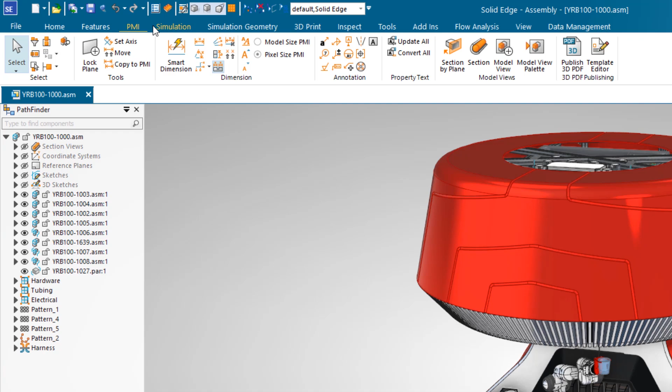Introducing a fresh, modern user interface which is consistent across all Siemens software products, all commands and environments have been refreshed and now provide an easier-to-use, modern, clean look and feel, but still at the core, the Solid Edge you know and love.

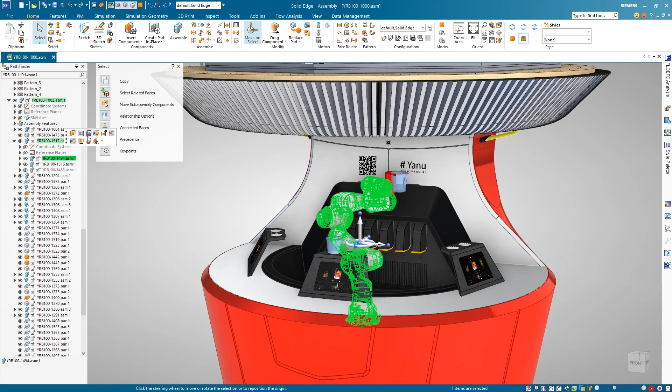The Context toolbar now has expanded capabilities in the part, sheet metal, and assembly environments, providing high-frequency, object-specific commands at the tip of the user's cursor, improving productivity. Focusing on the robot arm, we'll complete the new design of a glass holder.

The material addition and removal workflows have now been combined into one single command. Also new is the introduction of the automatic regions in ordered sketches. This speeds the process of sketching as it eliminates the need to trim sketch elements and project face edges.

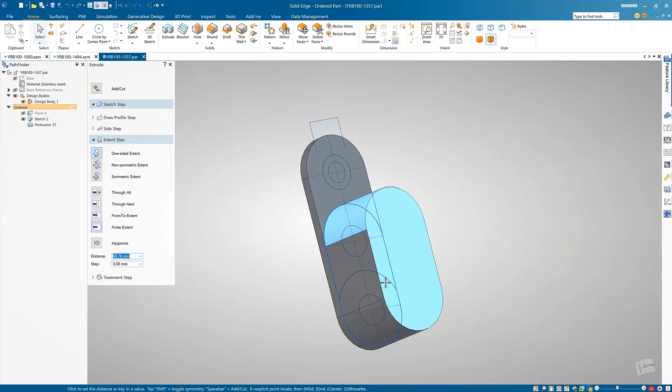Closed areas are simply found automatically, as can be seen here, as we add and remove material with a single extrude command. Also notice the Context toolbar delivering all commands at your fingertips. Changing an extruded feature to a cut couldn't be any simpler. Just edit the feature and change the options. When adding features, the spacebar can also be used as a quick toggle to switch between add and remove.

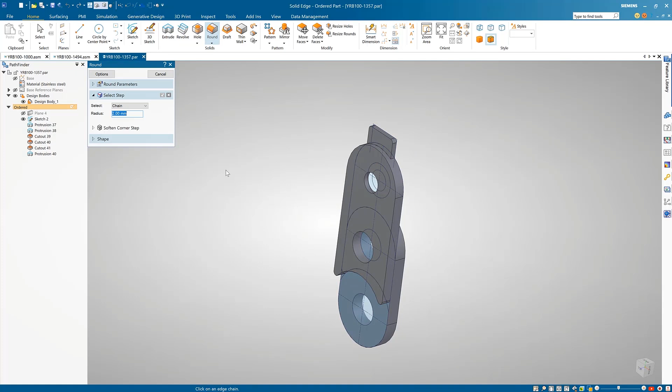Solid Edge speeds up the process of direct editing in an ordered model by introducing synchronous capabilities in the move, rotate, and offset face commands. Here, the steering wheel is used to easily define the move and rotate directions, and design intent rules can be used to control the movement of the other faces in the model. We can see this as we adjust these two cylindrical faces and toggle the concentric option off and on.

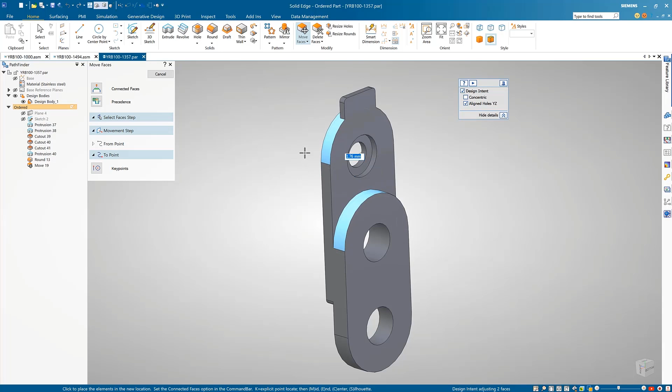One final alteration on this part is to add an angle to the side face by using the rotate command. The enhanced workflow makes this a breeze. Since this is an ordered model, the move and rotate features are captured in the Pathfinder and can easily be edited later.

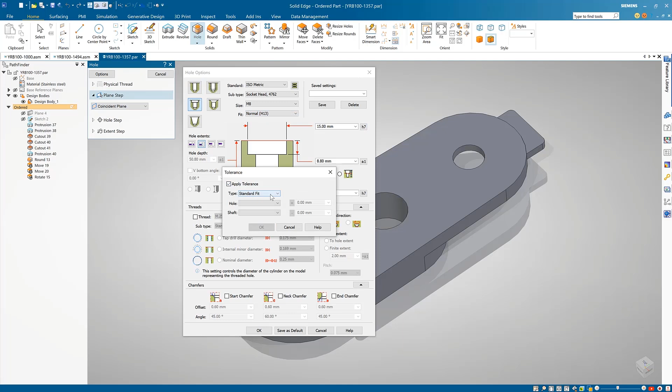The hole feature capabilities have also been extended and now have support for standard fit class tolerances for hole, countersink, counterbore type holes. These conform to ANSI, ISO, and DIN standards.

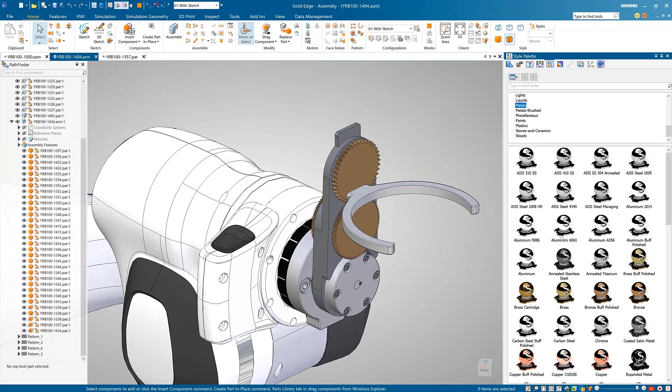Support for thread tolerance has also been added, as well as a new library of high-quality face styles which consist of many common categories containing thousands of different styles, ranging from additive manufacturing, coatings, fabrics, plastics, metals, and many more. They can simply be dragged and dropped onto the desired parts to easily add realism to any design.

There have also been improvements to assembly features with the addition of new commands such as subtract, slot, union, and swept cutout. In this case, we'll add a swept cut to document a routed path through two wooden plinths at the top of the design. The workflow is the same as in the part environment, but with the additional step of choosing the parts to cut.

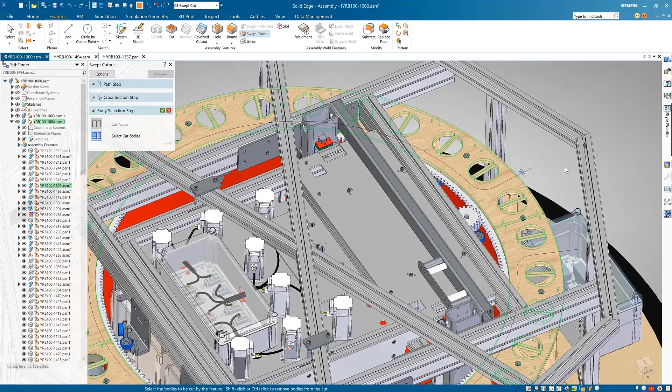Finally, there are new workflows to easily explore and visualize the internal components of any design with a new Visual Explode command. Simply drag the slider bar to dynamically explode the parts on screen, then drag it back to collapse the parts back into place. There is also a stepwise option which intelligently explodes the subassemblies in sequence and provides additional ways to visualize the design.

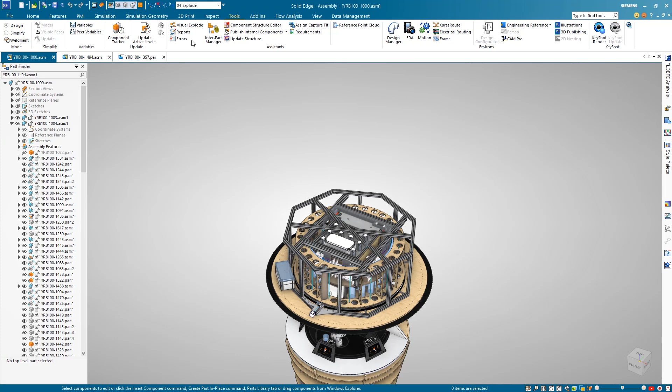Solid Edge continues at the forefront of 3D CAD and remains ahead of the curve thanks to increased core CAD performance, new and improved workflows promoting productivity gains, and the continuous implementation of user-requested features and functions.